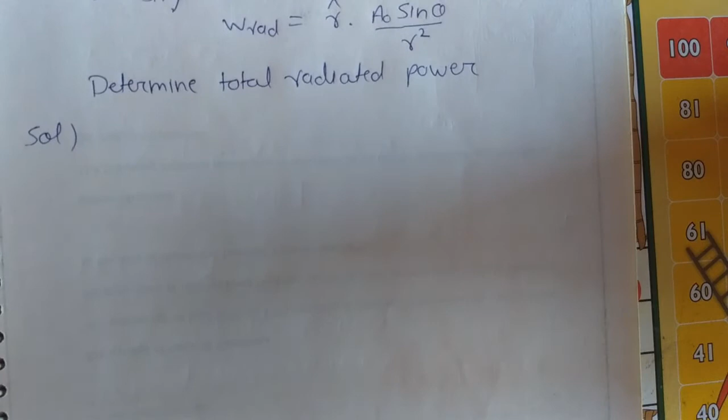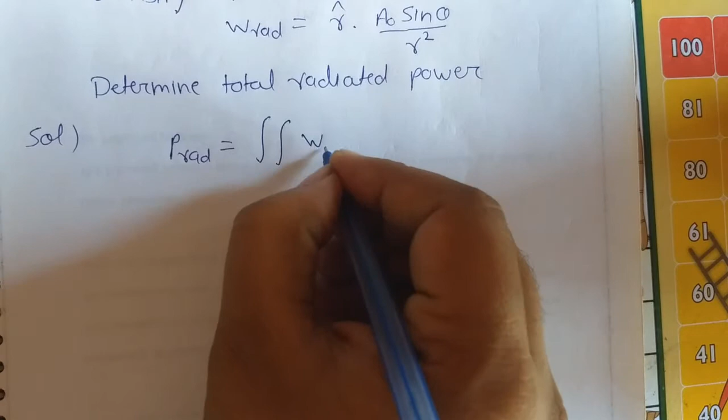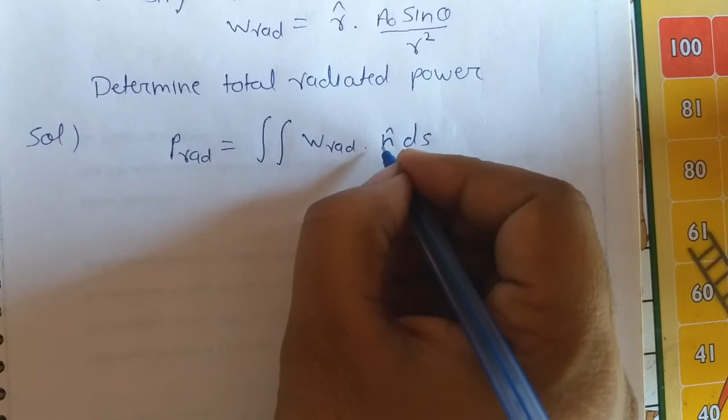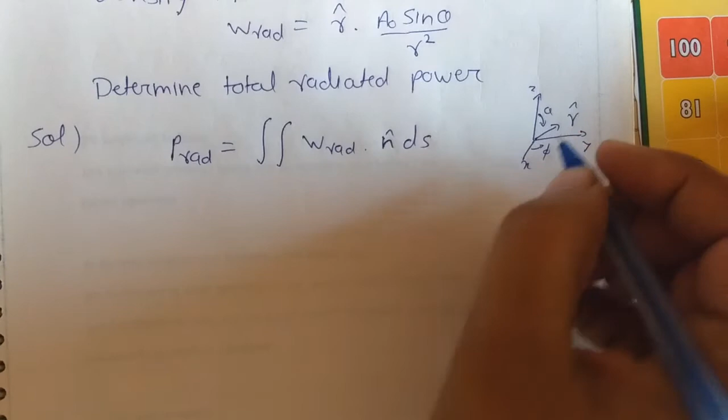We know the formula. If we know the radiation power density, then total power radiated equals the surface integral of W radiated dot n ds, where n is the unit normal vector. Now see, in the spherical coordinate system, r is the unit normal vector. Okay, x, y, z, r, theta, phi. So r is the unit normal vector. So P radiation equal to

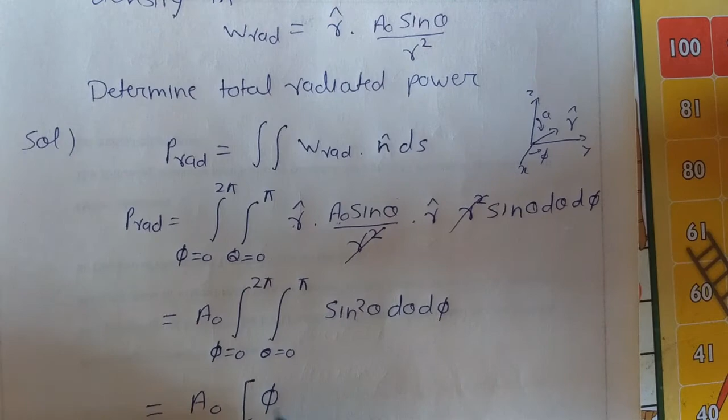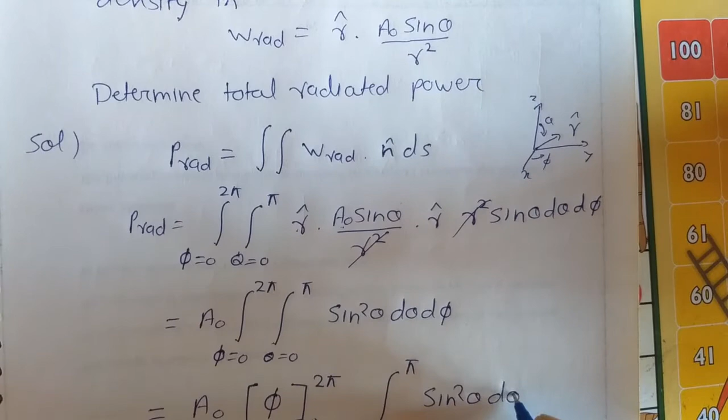A naught, first we integrate this with respect to phi, 0 to 2 pi. Now the remaining is 0 to pi sin square theta d theta d phi. Okay, so first we have to solve this, then we will proceed. So

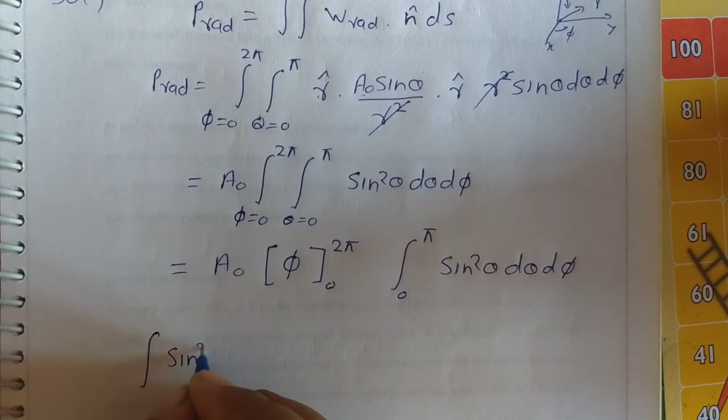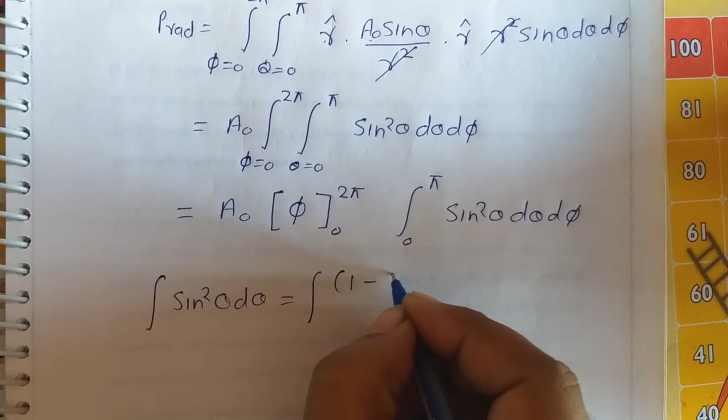Okay, we can write here separately integral 1 by 2 d theta minus integral cos 2 theta by 2 d theta.

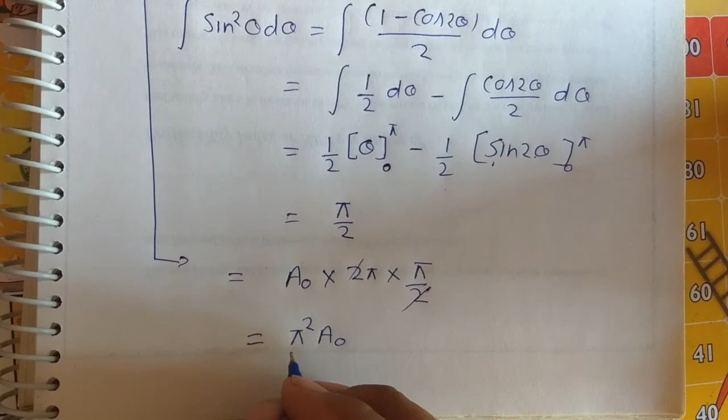Pi square A naught. So this is our total radiated power, pi square A naught. Now we can solve this numerical with another formula. Now you can see here W radiated, the radiation power density, is given to us. So by using this formula we can calculate radiation intensity. U is the radiation intensity. Radiation intensity equal to r square W radiated.

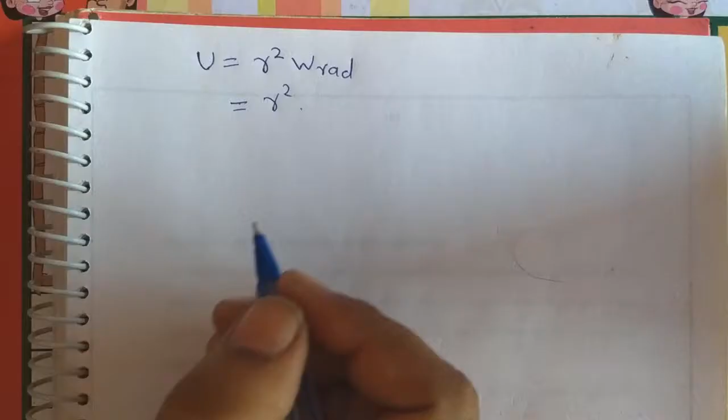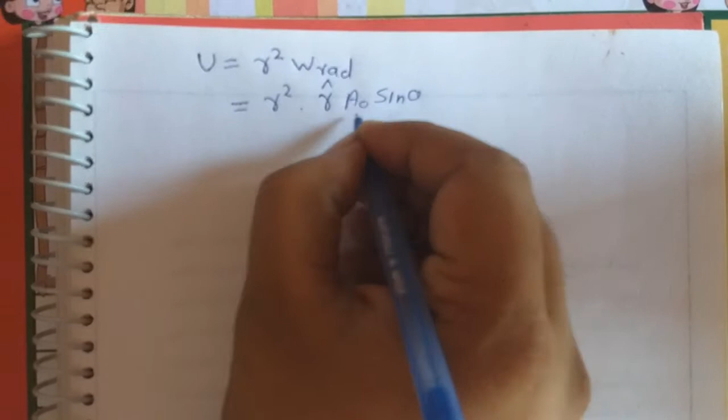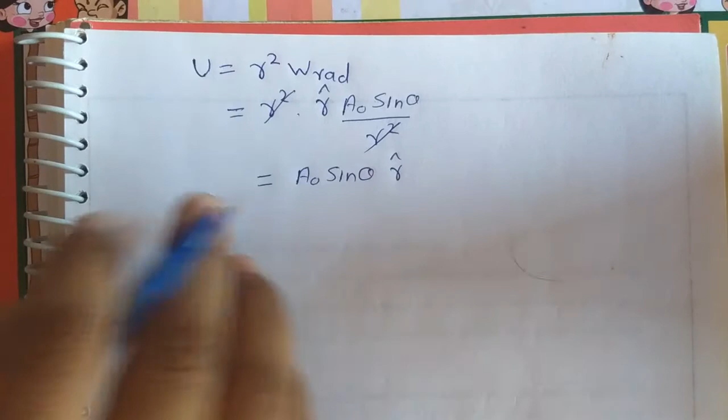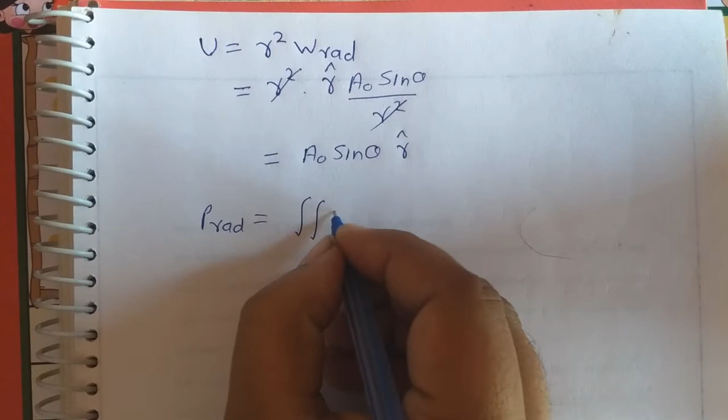Now we will put the value of W radiated. W radiated is given to us as r hat A naught sin theta divided by r square. So r square cancels with r square and what remains is A naught sin theta r hat. So this is the expression of radiation intensity. Now we know the formula: P radiated equal to double integral of U with respect to solid angle, where phi varies from 0 to 2 pi and theta varies from 0 to pi. So put the value here.

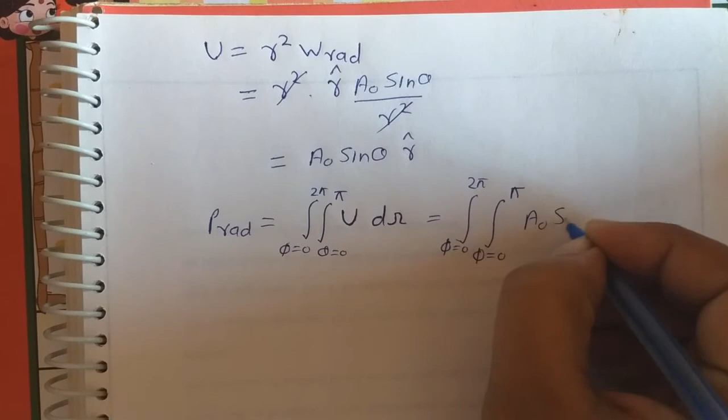Double integral, phi equal to 0 to 2 pi, theta varies from 0 to pi, A naught sin theta, and d omega is equal to sin theta d theta d phi. Okay. Double integral phi 0 to 2 pi, theta 0 to pi, A naught sin square theta d theta d phi.

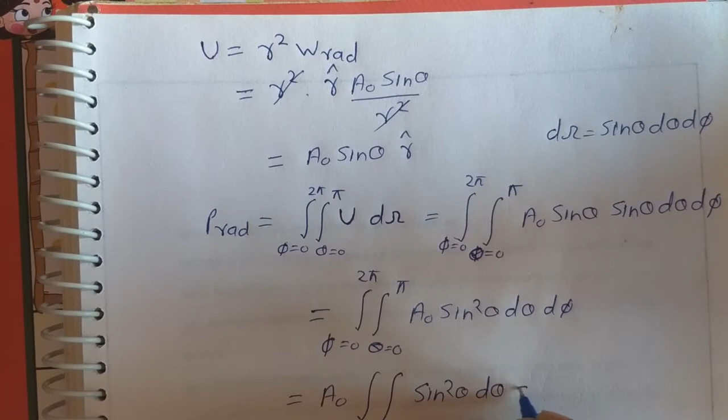A naught is a constant, so it comes outside. A naught double integral sin square theta d theta d phi. This we have already calculated in the previous calculation. With phi 0 to 2 pi and theta 0 to pi, it comes pi square. Pi square A naught is the answer.

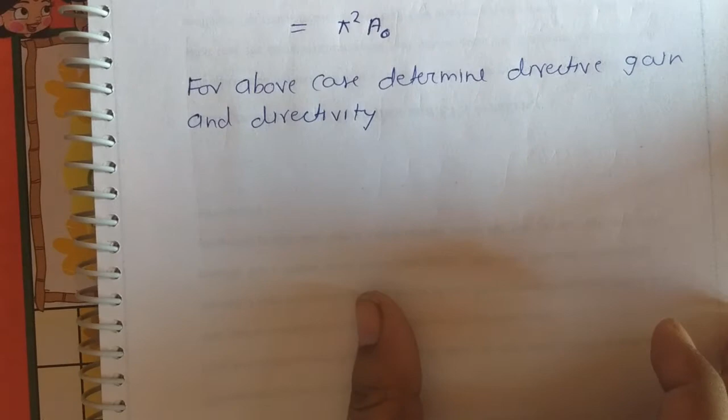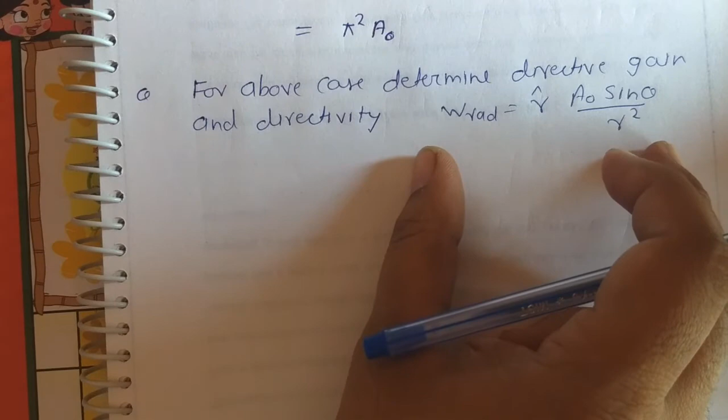Now see the next question. For the above case, determine directive gain and directivity. The expression given earlier was W radiation equal to r hat A naught sin theta divided by r square. This is given to us and we have to determine directive gain and directivity. So see, first we write here what we have calculated in the previous case: P radiation equal to pi square A naught.

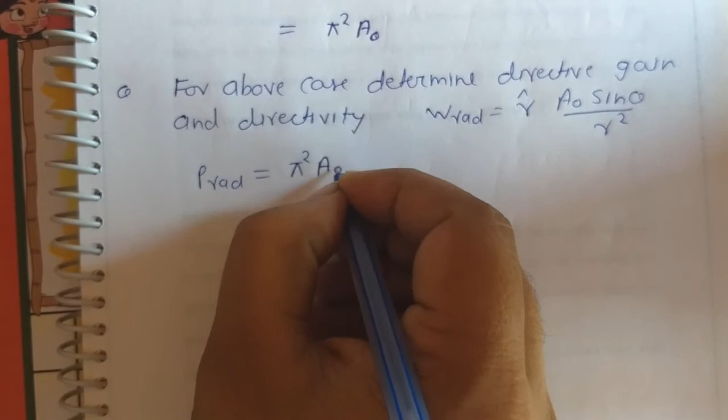So now we will calculate directive gain. Directive gain Dg equal to U divided by U naught, where U is the radiation intensity of the antenna and U naught is the radiation intensity of the reference antenna. So we can write here U divided by P radiated divided by 4 pi, and we can write here 4 pi U divided by P radiated.

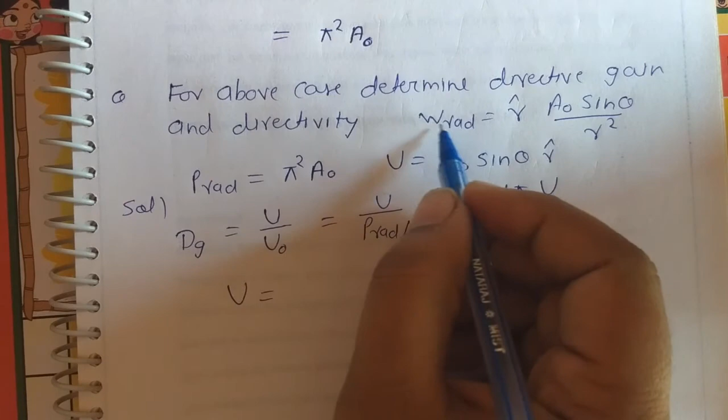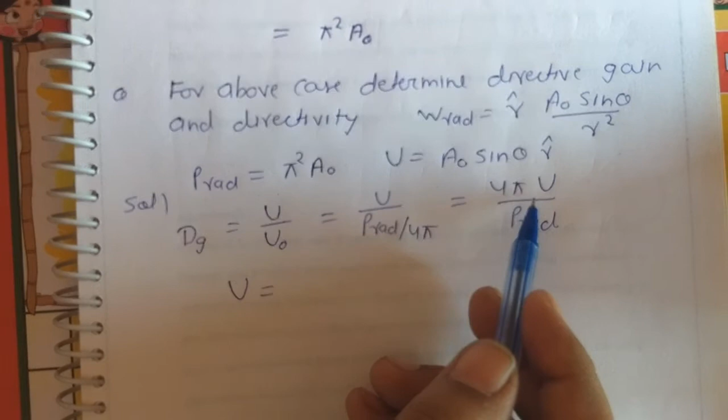So we have also calculated the expression of U equal to A naught sin theta R hat, or R square W radiated. By using this formula we can calculate U equal to A naught sin theta. Now we know the value of P radiation, we know the value of U. Put the value of U and P radiation in the expression of dg and we can find the value of dg.

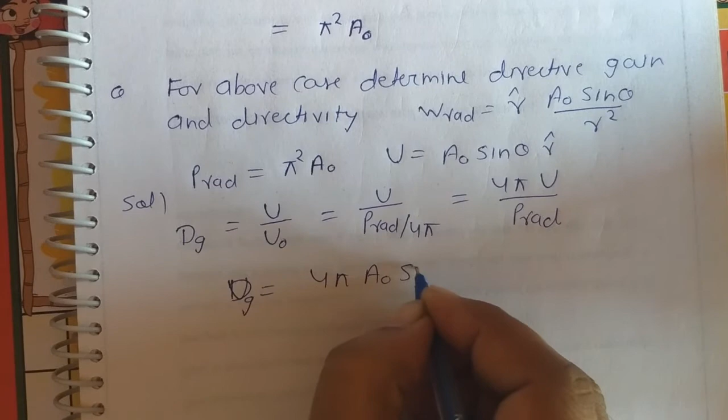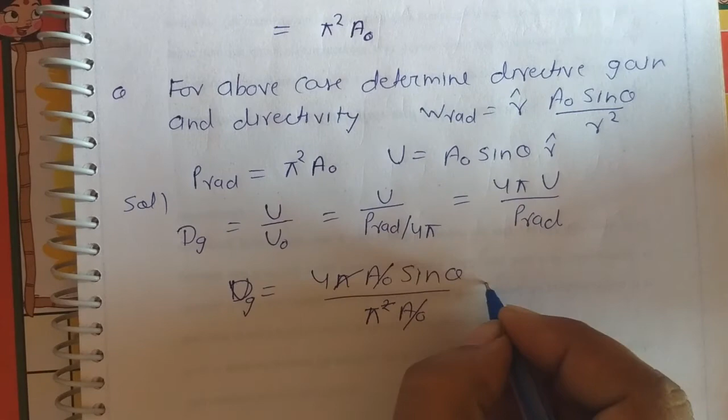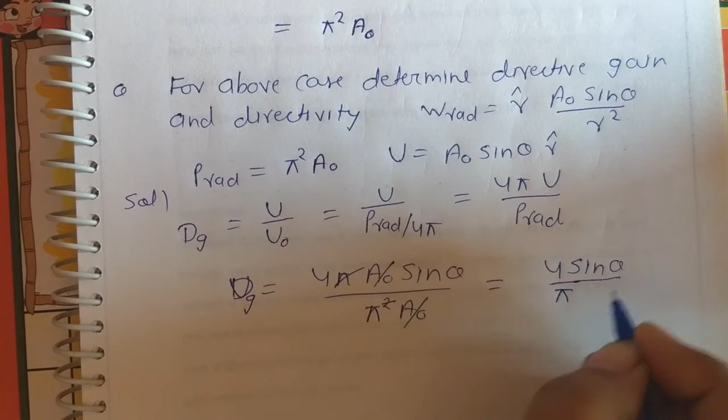Dg equal to 4 pi A naught sin theta divided by pi square A naught. A naught cancels with A naught, pi cancels with pi. dg equal to 4 sin theta divided by pi. This is the expression of dg. Now we have to calculate directivity. Directivity is nothing but the maximum value of dg.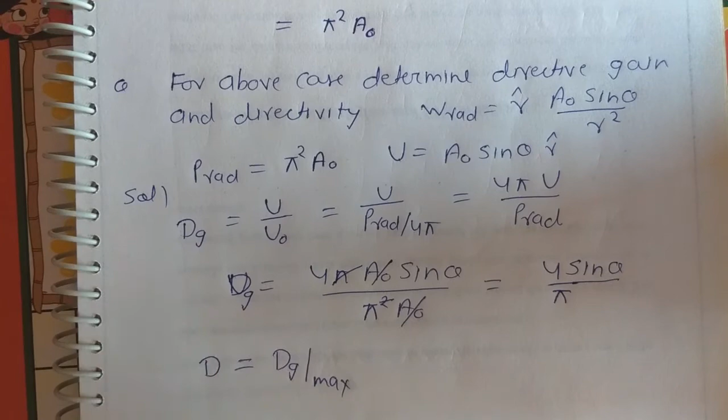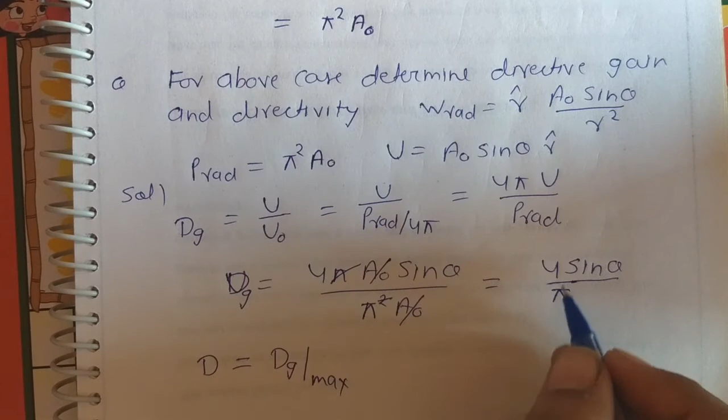Maximum value of dg. So you can see here dg equal to 4 divided by pi sin theta. So dg will be maximum for maximum value of sin theta, and we know that at theta equal to pi by 2, sin theta equal to 1, and 1 is the maximum value of sin theta.

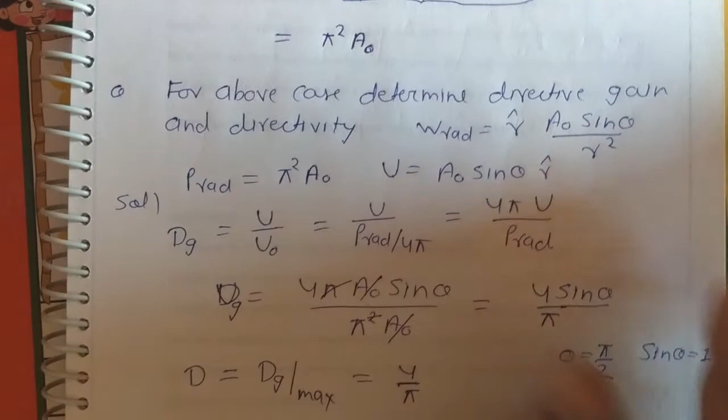So we can write here 4 divided by pi, and when we solve this, we see the answer is 1.27. This is the value of directivity. 1.27 is the directivity, and 4 by pi sin theta is the directive gain.

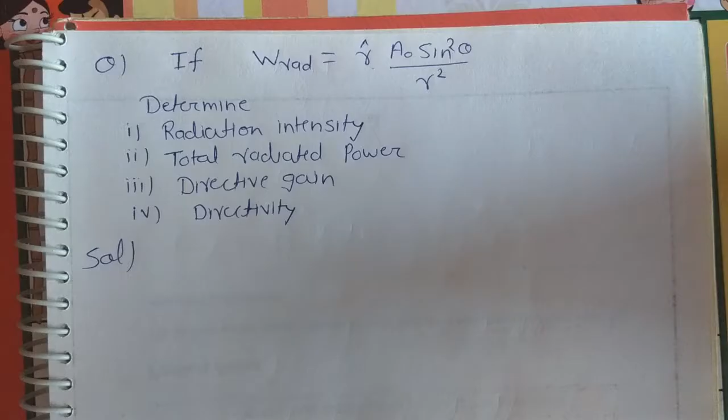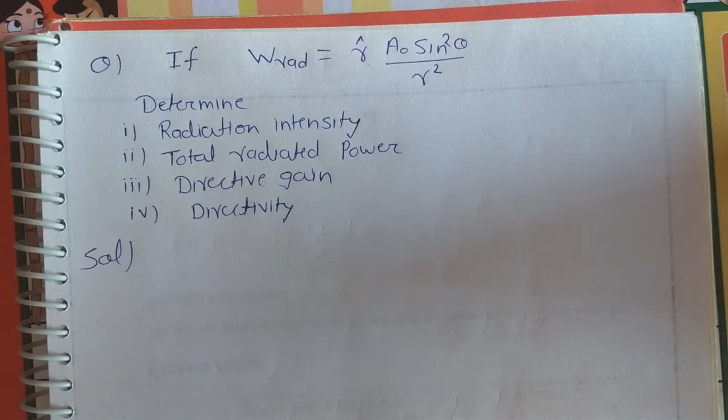Also in this question, radiation power density is given to us: r hat a naught sin square theta divided by r square, and we have to determine radiation intensity, total radiated power, directive gain, and directivity of the antenna. Okay, so we will calculate one by one. First we will calculate radiation intensity.

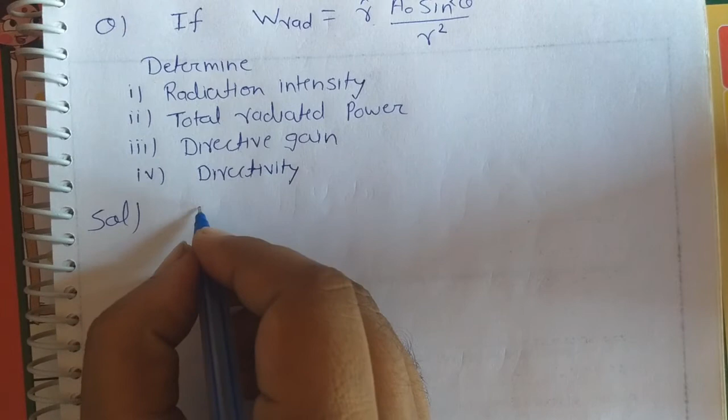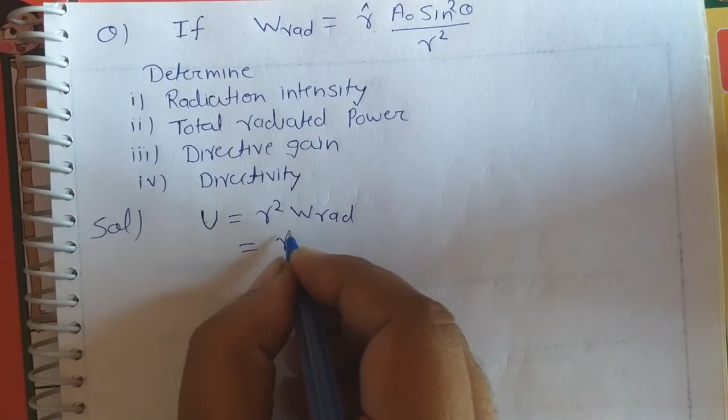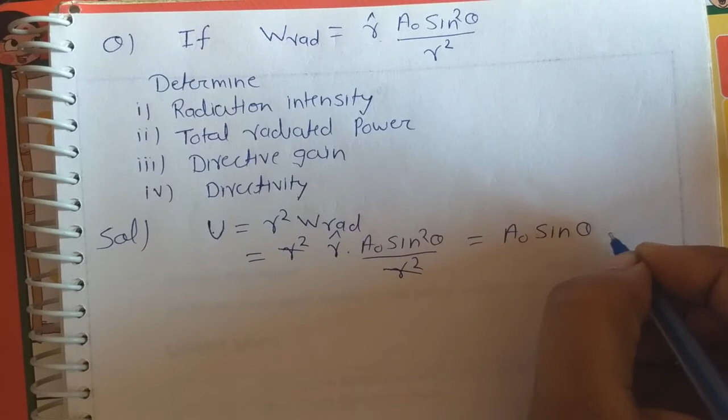So we know the formula: radiation intensity equal to r square W radiated. So U will be equal to r square W radiated. Put the value here: r hat a naught sin square theta divided by r square. R square cancels with r square. U equal to a naught sin square theta r hat. Okay, so this is the expression of radiation intensity.

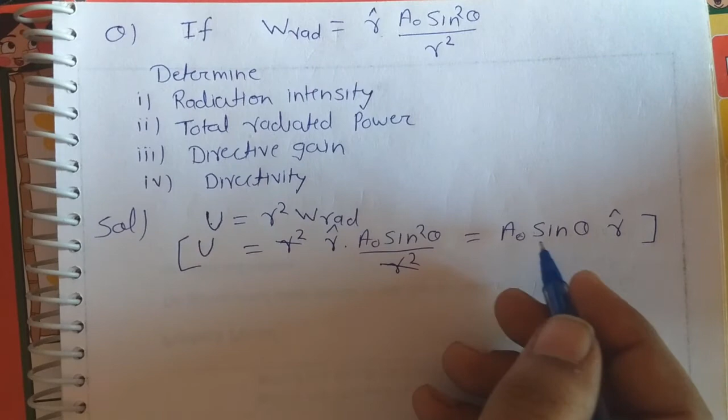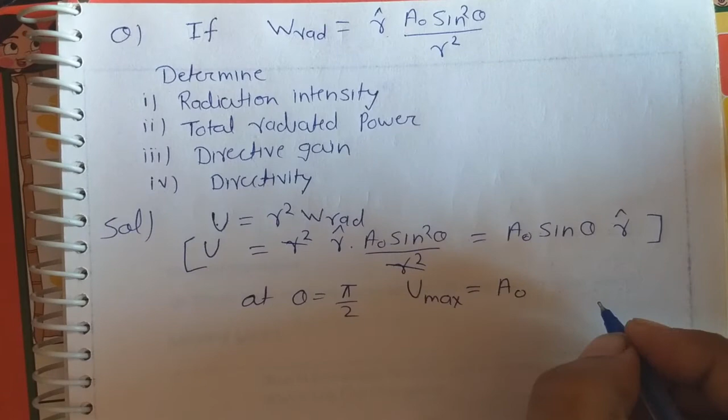And radiation intensity you can see here, a naught sin square theta. So at theta equal to pi by 2, U will be maximum, radiation intensity will be maximum. U maximum equal to a naught sin square theta. Maximum value of sin theta is 1, so U maximum will be equal to a naught.

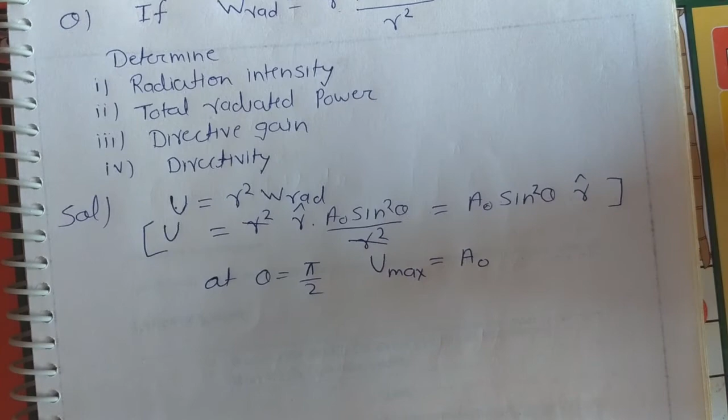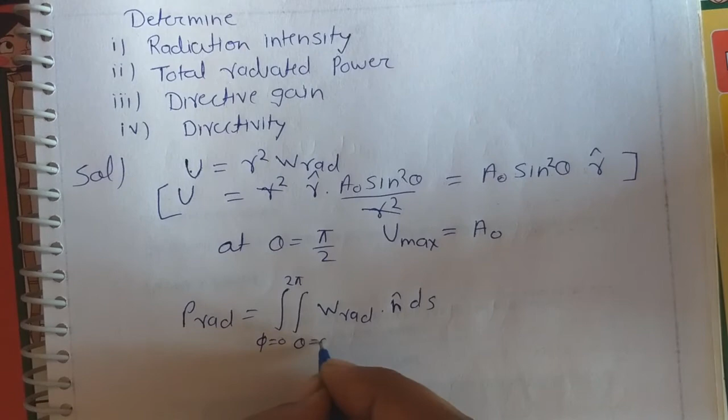Now next we have to calculate total radiated power: P radiated equal to surface integral of W radiated dot n ds, where n is the unit normal vector, and limits phi 0 to 2 pi, theta 0 to pi. Now put the value here: double integral r hat a naught sin square theta divided by r square dot unit normal vector, which is r hat in a spherical coordinate system, and the value of ds is r square sin theta d theta d phi.

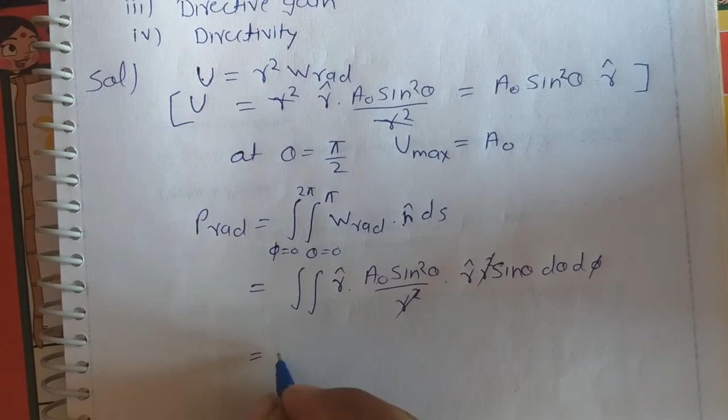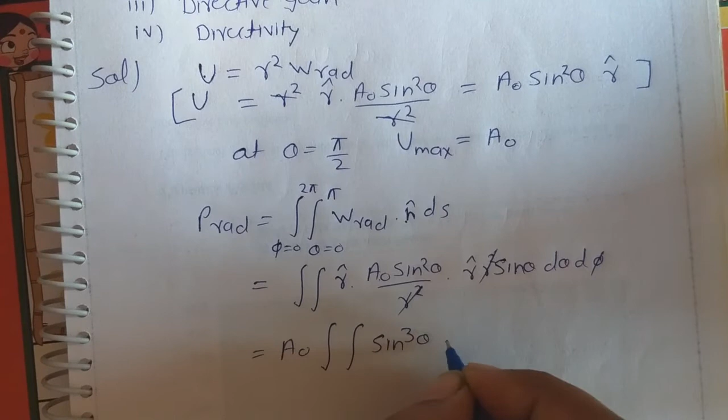r square cancels with r square. a naught is a constant, so it will come outside. a naught double integral, r dot r equal to 1, so the remaining is sin cube theta d theta d phi, and the limits are 0 to 2 pi for phi, and for theta it is 0 to pi. Now see here, I am writing the direct answer of this. You can check from the mathematics book the value of this integral of sin cube theta.

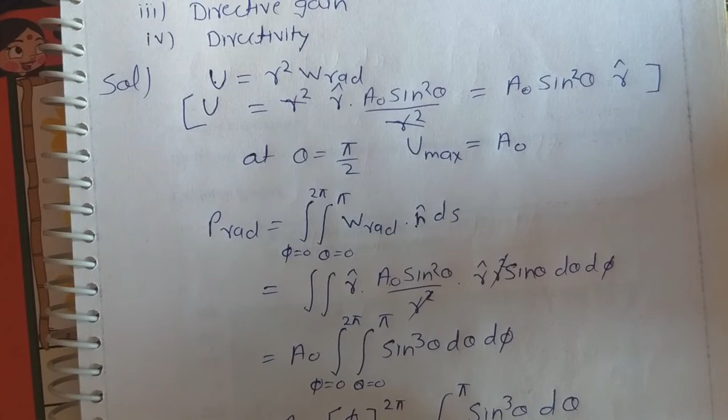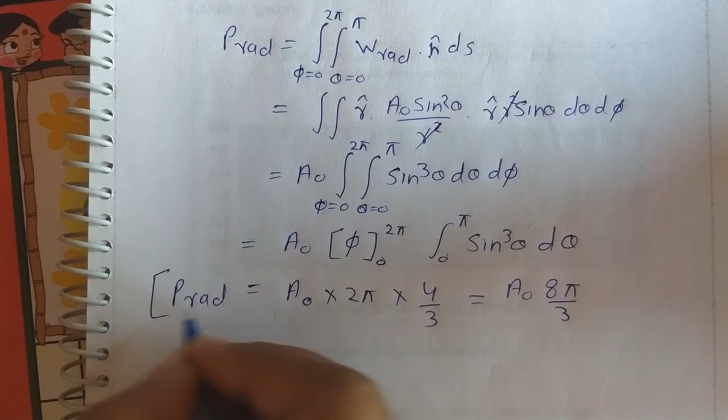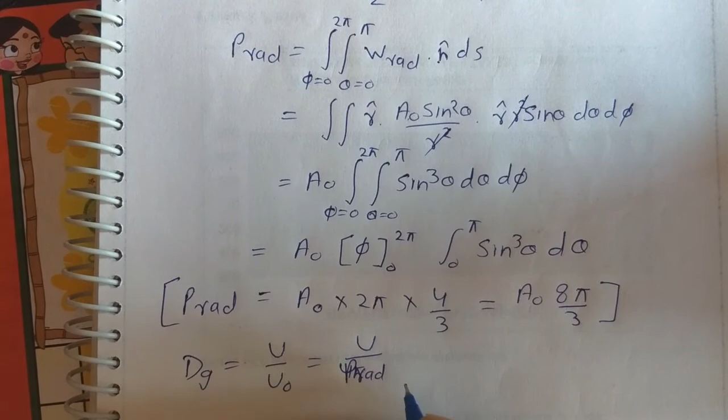So a naught into 2 pi into 4 by 3. The answer is a naught 8 pi divided by 3. This is the total radiated power of the antenna. Now we have to find directive gain. dg equal to U divided by U naught, where U naught equal to P radiated divided by 4 pi, or we can write 4 pi U divided by P radiated.

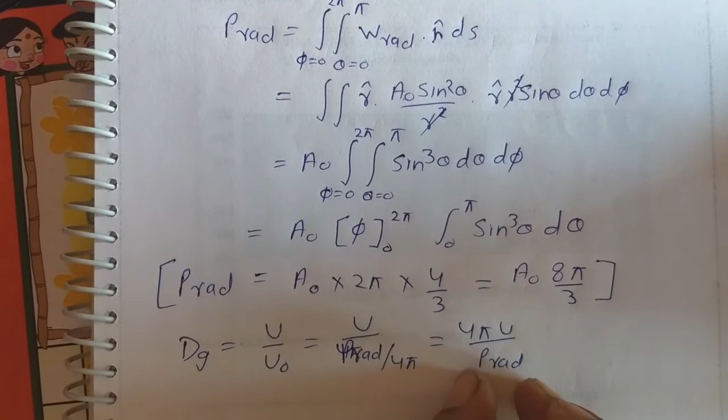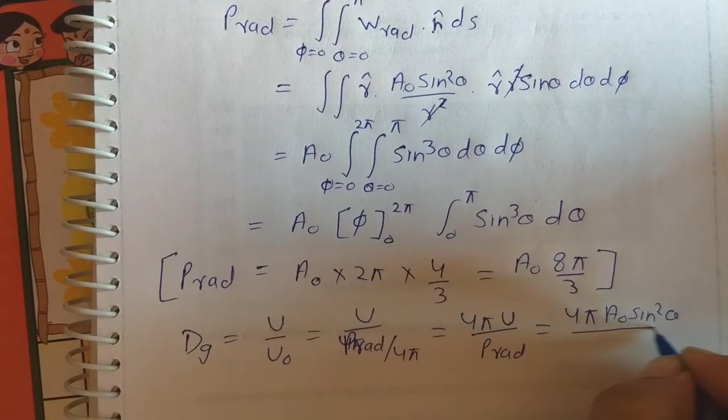We have already calculated the value of P radiated, and we have also calculated the expression of U. Put the value here: 4 pi a naught sin square theta divided by a naught 8 pi divided by 3. When we solve this, we find 3 by 2 sin square theta. This is the expression of directive gain dg.

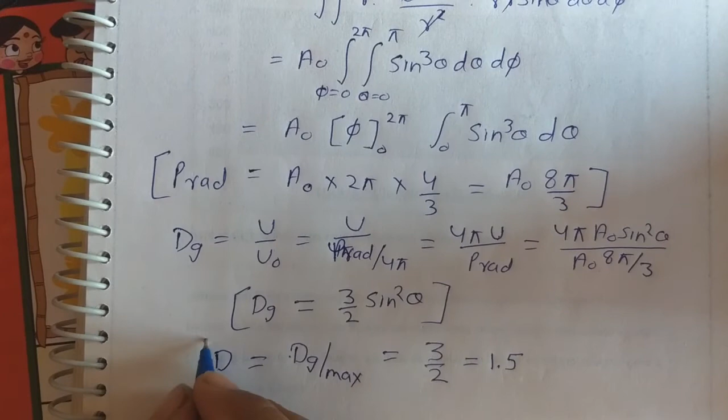And next is directivity. Directivity D is equal to the maximum value of the directive gain. So we know 3 by 2 sin square theta. Maximum value of sin theta is 1 at theta equal to pi by 2. So the maximum value of directive gain will be equal to 3 by 2, and that is equal to 1.5. So that's how we can calculate all these parameters with the help of formulas.

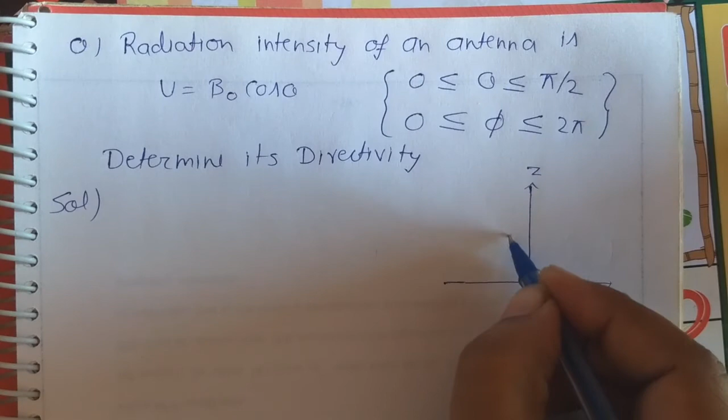The next question is, radiation intensity of an antenna is given to us U equal to B naught cos theta, where theta varies from 0 to pi by 2 and phi varies from 0 to 2 pi. This means the radiation pattern is only in the upper half, because theta is 0 to pi by 2. This is the z direction. So we have radiation pattern only in the upper half, like this, and we have to determine the directivity. Now see, in the previous lecture we discussed that we have two formulas of directivity.

One is the exact formula, which gives the exact value, and another is the approximate formula. So we will calculate both formulas and check how much error is there. First we calculate the directivity by using the approximate formula.

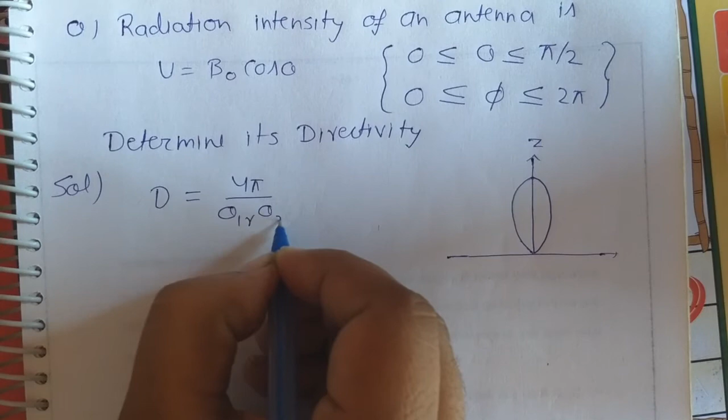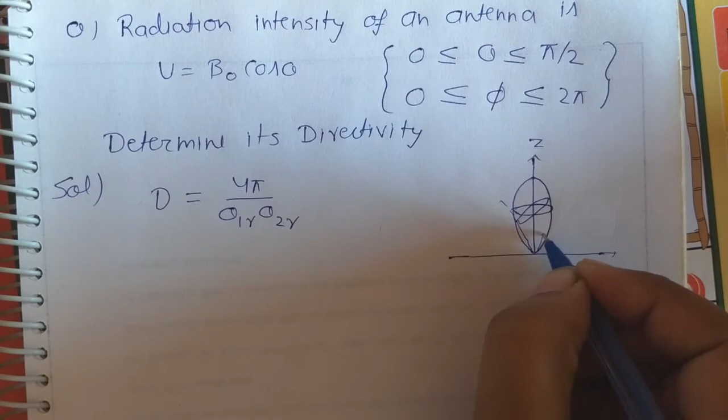D equal to 4 pi divided by theta 1r theta 2r, where theta 1r and theta 2r are the half power beam widths in two orthogonal planes. So this is the first half power beam width theta 1r, and this is the second half power beam width theta 2r. How to calculate half power beam width?

The expression of radiation intensity is given to us: B naught cos theta. First we have to normalize this. How to normalize radiation intensity? Divide the expression of radiation intensity by its maximum value. So first you calculate the maximum value. We know the maximum value of cos theta is 1, so the maximum value of radiation intensity is B naught.

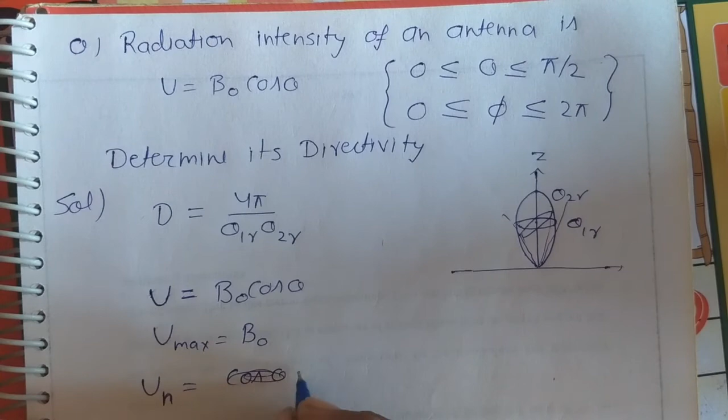Now divide this expression by the maximum value, then it will get normalized. Un, the normalized expression, equals cos theta, or you can write U divided by U maximum equal to cos theta. Now we know Un equal to cos theta.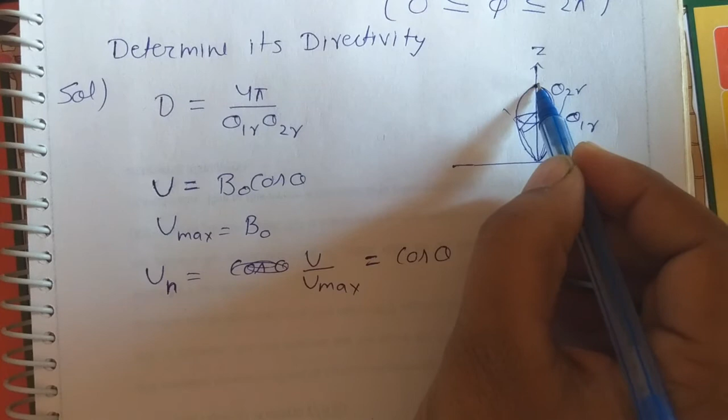Now we have to calculate half power beam width, meaning when the power reduces from maximum to half. Because it is a normalized radiation pattern, the maximum value will be 1, since we divided the expression by its maximum value. So at this point the value of radiation intensity is 0.5, or half. So cos theta equal to 1 by 2, and for theta equal to pi by 3, cos theta equal to 0.5.

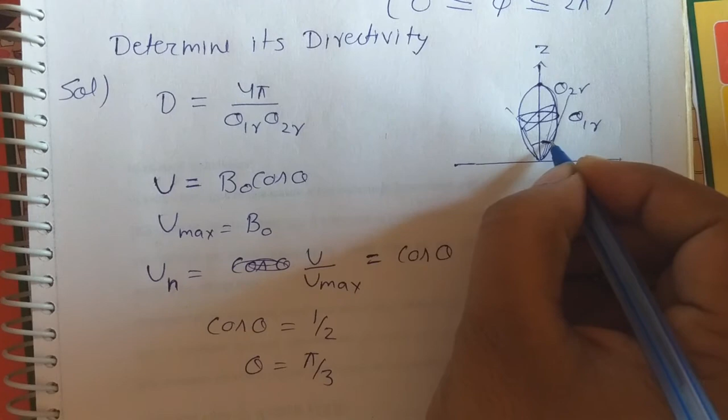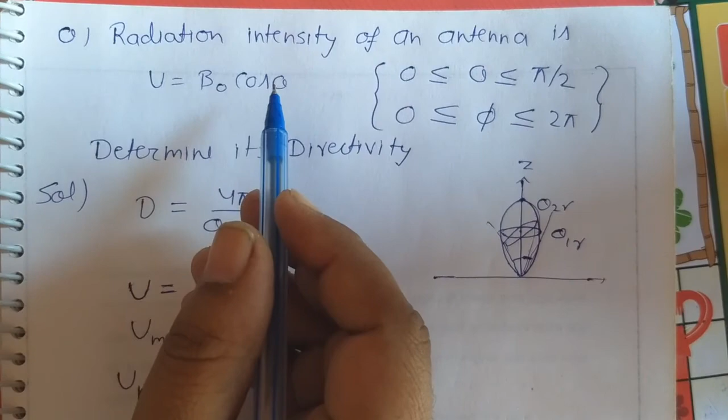So we have calculated this value theta, and the same value will be here also. The total will be 2 theta. So theta 1r equal to 2 theta, that is equal to 2 pi by 3. And U is a function of theta only, so in the other plane the half power beamwidth will be the same: theta 2r equal to 2 theta, equal to 2 pi by 3.

Now we can calculate the directivity easily. D equal to 4 pi divided by (2 pi by 3) whole square, which equals 2.86. So this is the value of directivity with the approximate formula. Now we will use the exact formula and calculate the value.

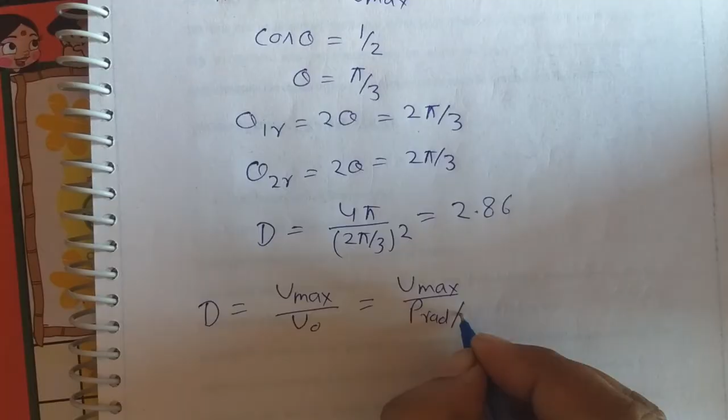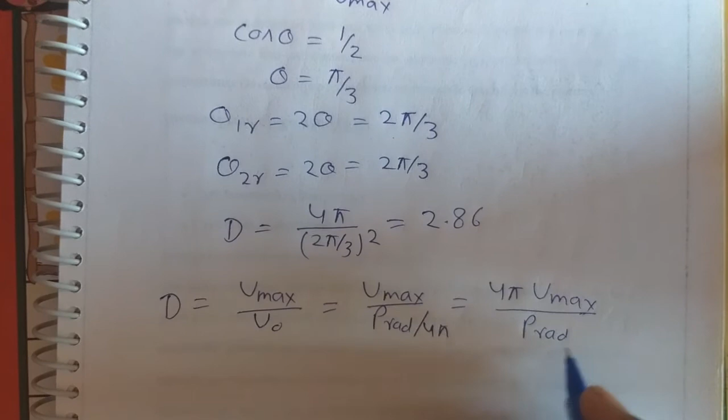According to the formula, D equals maximum radiation intensity of the given antenna divided by radiation intensity of the reference antenna. D equal to U maximum divided by U naught, where U naught equal to P radiation divided by 4 pi. So D equals 4 pi U maximum divided by P radiated. We have calculated U max equal to B naught. First we calculate P radiation.

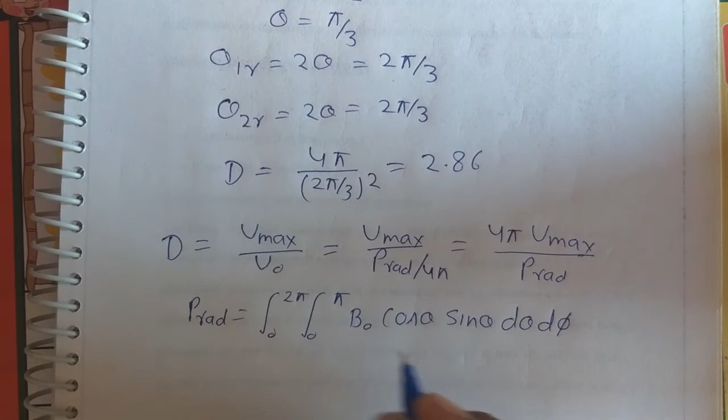P radiation equals integral 0 to 2 pi, integral 0 to pi of U d omega, where U equal to B naught cos theta and d omega equal to sin theta d theta d phi. The formula is P radiation equal to double integral U d omega, with phi from 0 to 2 pi and theta from 0 to pi.

B naught is a constant, so it comes out of the integration, times phi from 0 to 2 pi, times integral 0 to pi of sin theta cos theta, which we can write as sin 2 theta divided by 2 d theta. When we solve this, B naught into 2 pi into 1/2, that is equal to pi B naught.

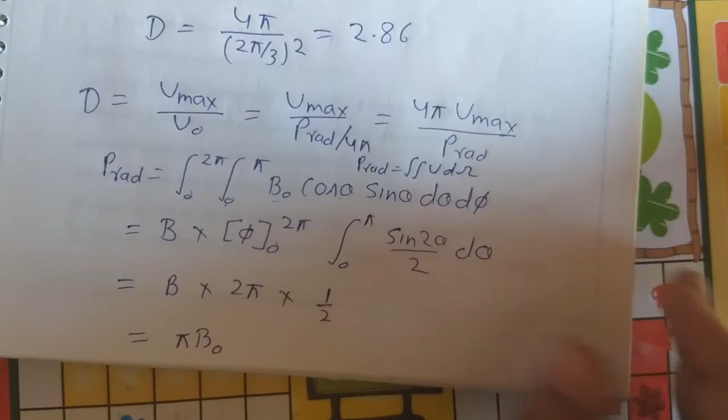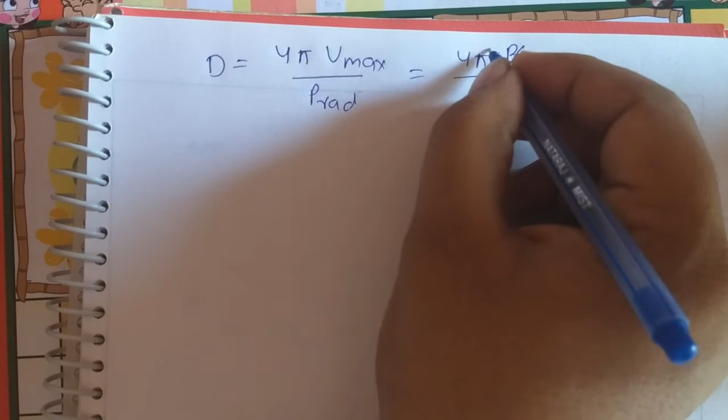Now D equal to 4 pi U maximum divided by P radiation. So 4 pi times B naught divided by pi B naught. B naught cancels, pi cancels, D equal to 4. So the exact value is 4 and the approximate value is 2.86.

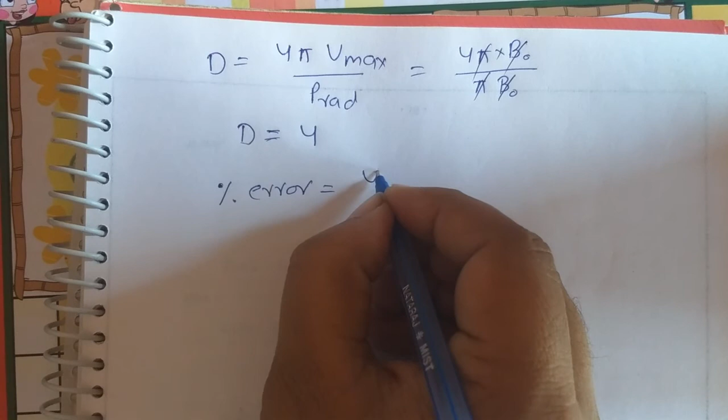So percentage error equals exact value minus approximate value divided by exact value, multiplied by 100, and that is equal to 28.5%. So this is the error. That's how we can solve numericals with the help of formulas.